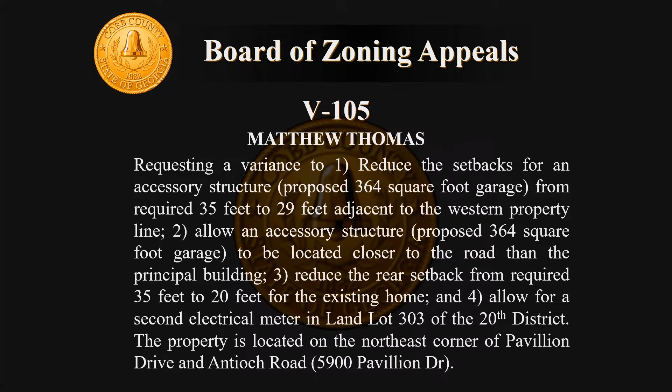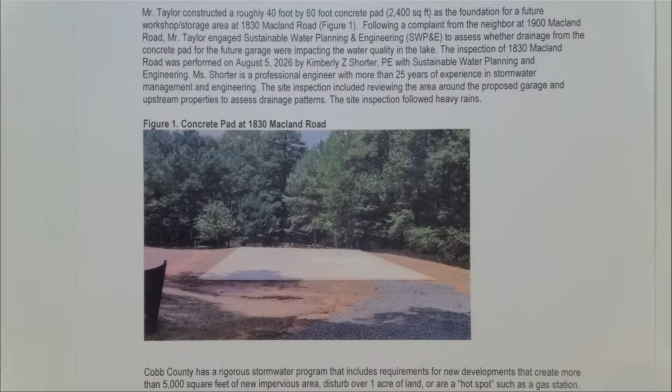The inspection of 1830 Macland Road was performed on August 5th, 2026 by Kimberly Shorter. The site inspection included reviewing the area around the proposed garage and upstream properties to assess drainage patterns. The site inspection followed heavy rains. Cobb County has a rigorous stormwater program that includes requirements for new developments that create more than 5,000 square feet of new impervious area, disturb over 1 acre of land, or a hot spot such as a gas station. This project does not meet any of those criteria and does not require a formal stormwater management plan.

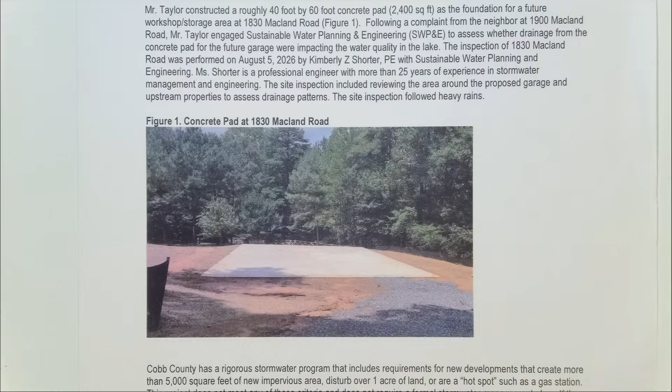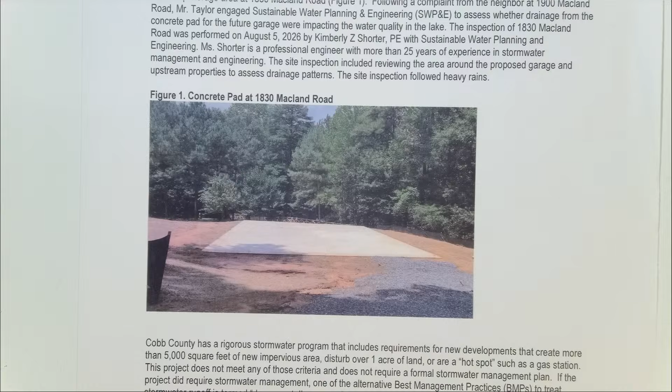According to the Georgia Stormwater Management Manual, downspout disconnects are appropriate for impervious area 2,500 square feet or less and require an overland vegetated path of at least 15 feet, Figure 2. This site meets these criteria, and most of the overland flow is over a considerably longer length than 15 feet. Currently, there are no signs of concentrated flow coming from the concrete pad at the property line downstream of the concrete pad, Figure 3.

During the inspection, there were signs of water draining across 1830 Macland Road onto 1900 Macland Road. However, this flow is generated on upstream properties and simply conveyed across Mr. Taylor's property. There is a pipe under the driveway located on 1846 Macland Road, but it appears to be shared by several properties, 1846, 1900, 1840, and possibly 1828 Macland Road.

Upstream stormwater is conveyed through the pipe under the driveway and onto 1830 Macland Road, which is our property. Stormwater flows through a riprap channel, and then sheet flows across the northern grassed area of 1830 Macland Road prior to flowing onto 1900 Macland Road, Figure 4. The flow bypasses the concrete pad area, and stormwater from the concrete pad does not flow into this drainage, Figure 5.

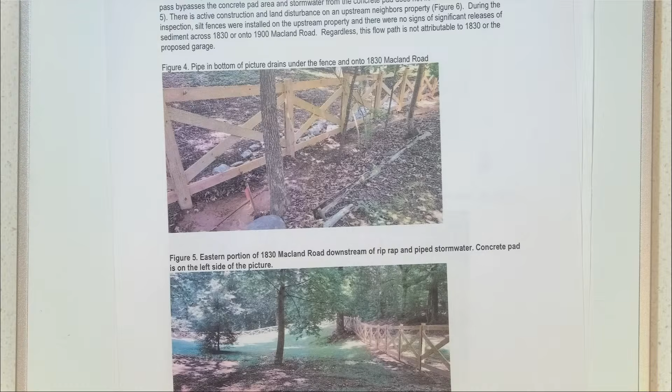From a drainage perspective, the concrete pad is in an ideal location. It is downstream of the septic tank, avoiding overwhelming the soils in that area. It is to the west of the drainage from upstream properties described in the previous paragraph. The majority of the drainage from the concrete pad flows west by southwest across the backyard of 1830 Macland Road in sheet flows for a distance of over 250 feet before leaving the property into the channel downstream of the pond in question, Figure 7.

The majority of the water from the concrete pad and proposed garage does not flow into the pond at 1900 Macland Road. It flows overland across 1830 Macland Road as sheet flows and infiltrates into the ground. A very small portion of the slope adjacent to the concrete pad does flow north. There were no signs at the property line of flow from the garage impacting 1900 Macland Road.

There do appear to be some flow patterns behind the fence located on 1830 Macland Road, where the water from 1900 Macland Road flows onto 1830 Macland Road and then back onto 1900 Macland Road, but there was no evidence of erosion or concentrated flows. This stormwater movement is due to natural topography and is not associated with the concrete pad or proposed garage.

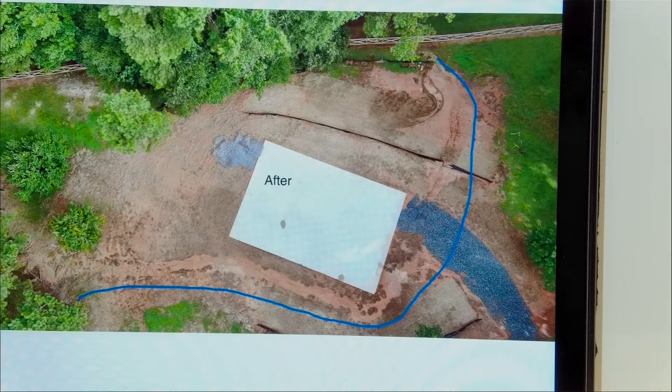You can clearly see from these before and after photos that the water flow is now being focused and diverted around this huge concrete slab to the east side, directly downhill to my property and continually adding sediment and debris to my pond. You can also see that it knocked down 3 separate layers of silt fence and washed most of the straw matting down the hill due to the extreme volume of water.

After this photo was taken, they repaired the silt fence and even added a 4th layer. Here's the aftermath of a 10-minute rainstorm this past Sunday. The water and mud easily made it past all 4 layers. I have video of this at the end if there's time. You can also see that the ground was sloped in this direction on purpose. All the runoff from the neighboring property at 1828 Macland Road also flows into the same area through a culvert under the driveway. So now all the runoff from both properties is being focused in one small area.

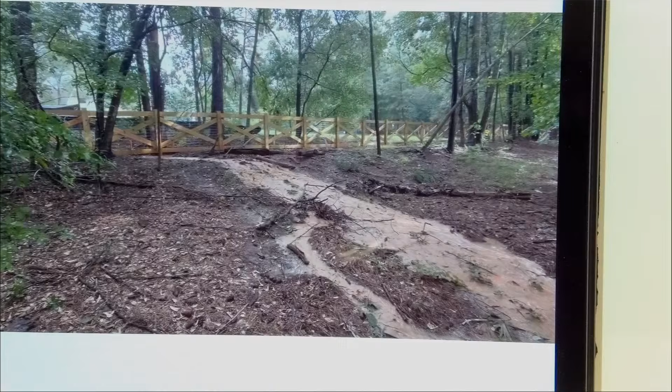There is a swale that runs along the property line on my side, which is meant to carry the water off to the west and away from the pond. Since the construction started, it has eroded away directly below the slab, allowing almost all the runoff to go straight down the hill into the pond. This blatantly defies Georgia common law, which says that an uphill property owner cannot deliberately redirect and focus water runoff onto a downhill property other than what would occur naturally.

As I stated in the last hearing, having a natural slope and permeable ground always allowed the runoff to dissipate without causing any damage, but that's not the case anymore. I've lived on this property for over 20 years and never experienced these issues until this unpermitted construction started back in February. This is one of the reasons why the 100-foot setback is so important in this situation.

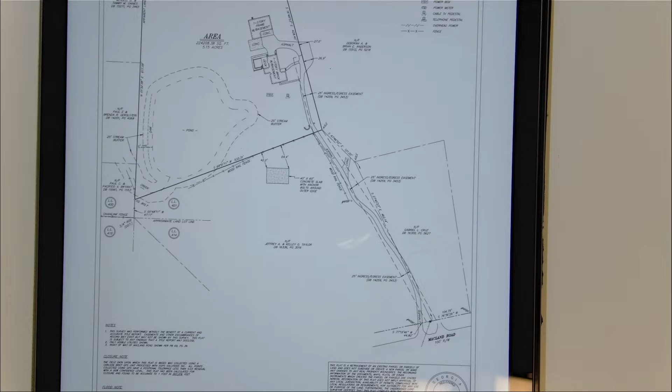I also want to address a few points I made in the last hearing that were brought into question. First being the exact location of the slab. I had stated that the slab was around 40 feet from the property line, while Mr. Taylor stated when asked directly that no part of the slab was closer than 86 feet to the property line. I recently had a certified survey of my property done and also had them precisely locate the slab's location in relation to the property line. And it is exactly 42.2 feet.

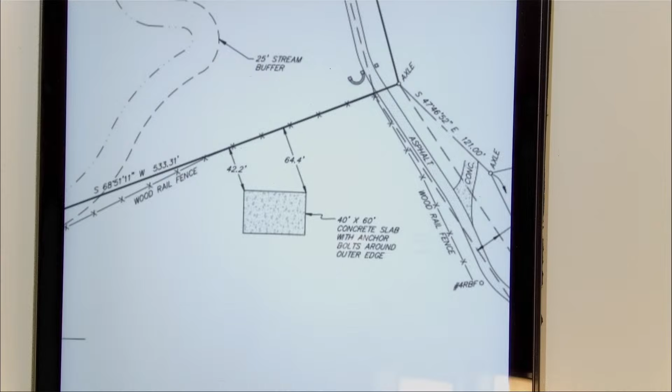Mr. Taylor knew all along that it was much closer than 86 feet, and I know this because here's a site map he submitted with his building permit application back in March of this year after he was shut down by the county. You can see that he wrote in a dimension of 50 feet from the line.

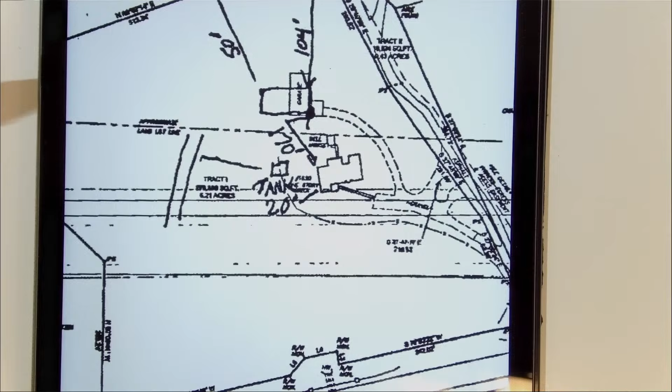Also, this survey that he's used for the permit and variance applications is an old survey from 2017, and none of the buildings on it exist anymore. The house on this survey was built in 1950 and torn down in 2018. The building labeled garage was actually a pole barn, also built in the 50s and torn down in 2017.

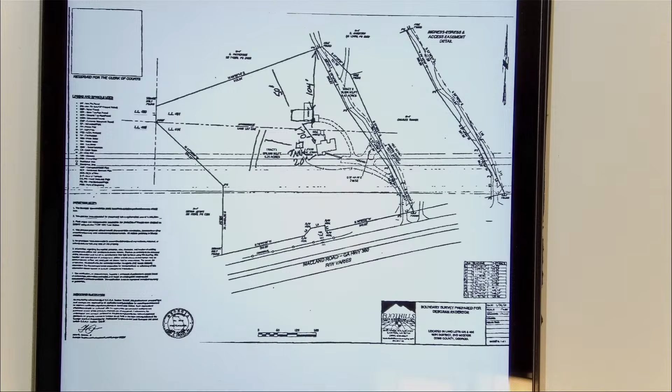Here's a simple tracing comparing the 2 surveys, and you can clearly see the old barn was in a completely different location than the new slab, even though Mr. Taylor claimed there was a building on this location previously. I have copies of both surveys for you to compare for yourselves.

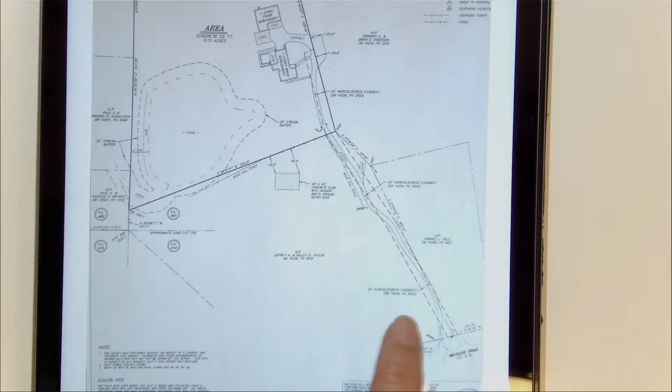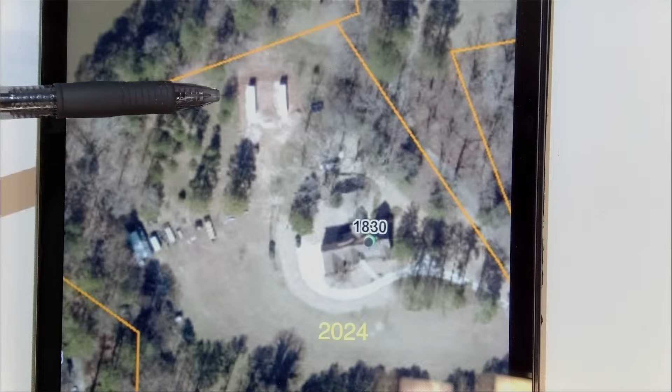Here are some aerial photos from the Cobb County website over the years. Here it is in 2019, right after the current house was built. As you can see, there are no other buildings on the property. As we move along to 2024, you can see where the previous owner had tried to build a pole barn over 2 shipping containers. This was immediately stopped by Cobb County, and he was forced to remove everything, as you can see on the 2025 and 2026 photos. That's after everything was removed before the Taylors purchased it.

The ground in this location never had any permanent foundation, only some gravel and fill dirt. A precedent has already been established by the county that this site was not suitable to build on for multiple reasons.

On the subject of his permit application, the proposed building would have 12-foot tall walls with corrugated metal siding and what looks to be a 6/12 pitch roof, creating a nearly 20-foot tall industrial-style building in a residential zone property. I brought copies of the permit application for your review if needed also.

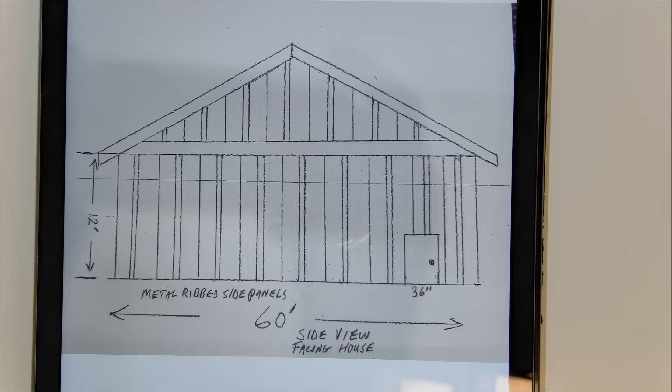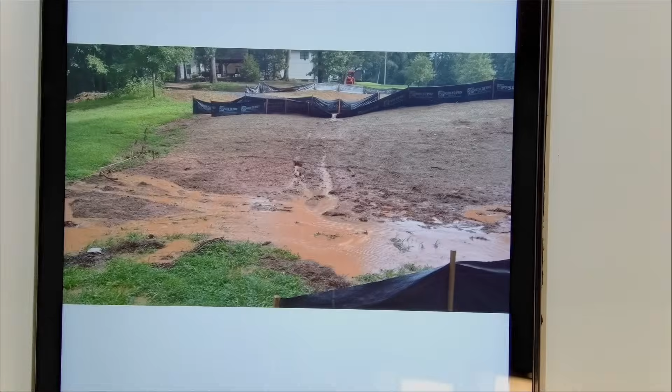I have yet to hear a legitimate reason given why there's no other suitable spot for the structure that meets zoning requirements, or if it has even been thoroughly considered, which is the standard for granting a variance. The only reasons given seem to be that it's just the spot where they want to put it because it's at the back of their property and far away from their own house.

The problem is that the back of their property is the front of mine, and they want to put a house-sized, commercial-style building right at the entrance to my property. As I've stated before, there are multiple areas on the property that would easily meet all zoning requirements and alleviate much of the runoff issues. As a 47-year resident of Cobb County, I'm once again urging the board to uphold Cobb's longstanding zoning rules, which we all are aware of when buying property, and not reward someone that's deliberately ignored those rules.

And now this is the video from last Sunday. This is with 4 layers of silt fence. That was the swale that's been referred to. This is where it's eroded away and going straight down the hill to my property. And you can see it's coming directly from around the side of the slab. There was never any complaint about the slab itself running off onto the property. It's diverting the water around it. This is after the rain stopped and only a 10-minute rainstorm.

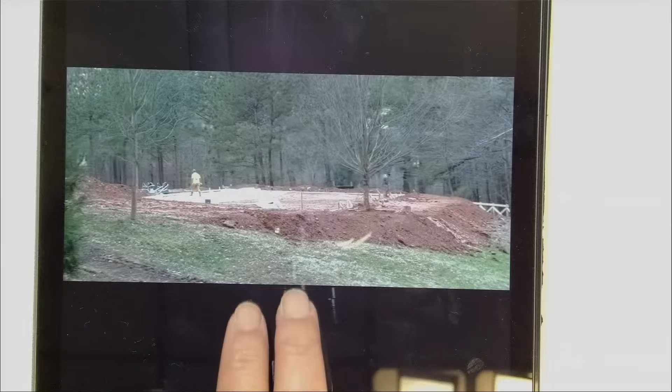One more thing I'd like to touch on. In the last hearing, I stated the slab was probably not code compliant due to the lack of footings. Mr. Taylor claimed that there are 24-inch deep footings around the perimeter. I made my statement from what I personally witnessed when the slab was graded and poured, and going by my nearly 40 years of experience in the construction business.

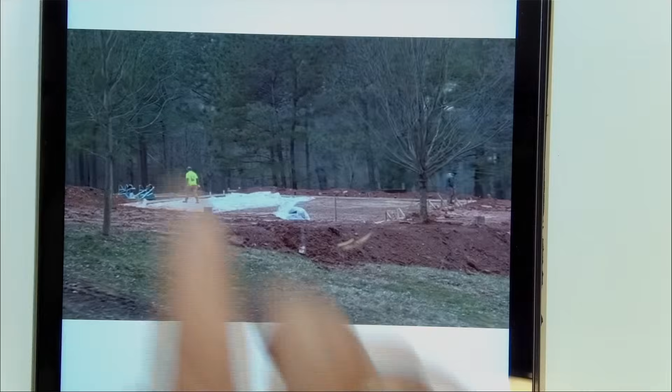It was suggested by the board that the slab should be looked at by an engineer due to the fact that no inspections had been done to any of the work, but I have not heard any follow-up to that. That was the slab when it was being graded. It's pretty obvious to a trained eye that there's no footings dug there. That's all I have, I think.

You do have 55 seconds, excuse me, left. Is there anything else that you would like to share with us? I guess I'd just like to add that Mr. Taylor showed up at my property this morning about 3 hours ago, the first time I've ever spoken to him in my life. So 6 months of this, and that was the first contact ever made, so for what it's worth. Okay. If that concludes your testimony, I will turn this over to our District 1 Commissioner,

Commissioner Berloin, to lead our discussion. Go ahead. Thank you, Chair. Let me start with you, Mr. Patterson. So those photographs you began with today, when did you take those photographs? Which ones? The ones you started your presentation with this afternoon? Not the historical photographs, right. This one, oh, I'm sorry. That one was before the recent work started.

Then the next one, that's when they started regrading it before we got any rain. So when was this regrading approximately? About 2 weeks ago it started. Okay. Well, July 31st was when that was taken. All right. So tell me about the conditions. I mean, this variance first was filed for in like March of this year, sometime earlier in the spring. Tell me what things were like, not just in the last 2 weeks, but say in May of this year.

If you could, with the time that you have remaining, just give us a synopsis or a summary of what it is that you're trying to accomplish. Just remind us again of your variance case, please. Okay, so we built a pergola in the backyard, which we did not obtain a permit. We did not know that we needed a permit because it was just a pergola. The landscapers that built it for us said, oh, you don't need a permit, you don't live in an HOA. So we believed them. We got it constructed, and then the neighbor next door put in the complaint that it was too big, that it was over her property line, and that was about it.

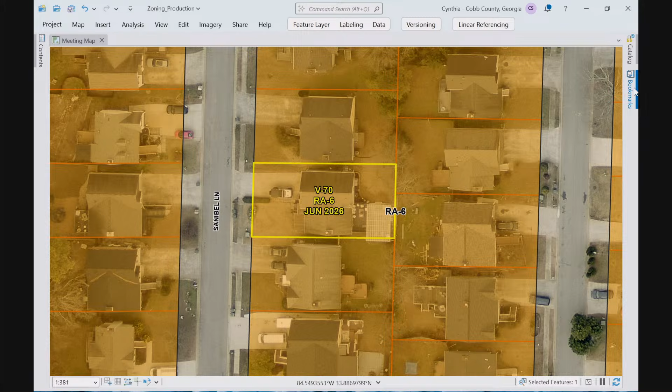Okay. Is there anything else that you'd like to share with us since? Well, since the last time, we reduced the pergola a little bit because she says that we were on her property line. So I reduced like 8 inches, so I'm away from her line, and everything that she told us that we have to do, we did. So we fixed all the problems, so I guess that's why she's not here, since we fixed everything that was bothering her. We also replaced a piece of grass.

We removed a fence door that we put in between, which she had agreed with, but she changed her mind and she said remove it, so we removed it. She did ask for us to reimburse her $500 for 3 trees that he cut, and that's the last thing we heard. Last time she was here, she said that she was going to sue us, but we never heard anything from anybody. Okay.

Does that conclude your testimony? Because you have 7 minutes and 57 seconds remaining. No, that's it. Okay, if you guys can remain, because there is an opposition here, we'll close the public hearing for this. This does reside in my district, so I will lead the discussion. Just have a few questions.

I know that there was heavy opposition here last time. She had a lot of things that were of concerns to her, and she's not here today in opposition. And you said that you were able to satisfy her concerns, even with the $500 that she asked for. Did you remit that to her? We have not given it to her because we said we have no problem giving you that. Even though originally she said that she paid $75 for each one, we were like, that's fine, for the inconvenience or whatever. But we told her that we just needed a paper where she is agreeing that that's what she wanted. But like I said, we didn't hear anything from her afterwards.

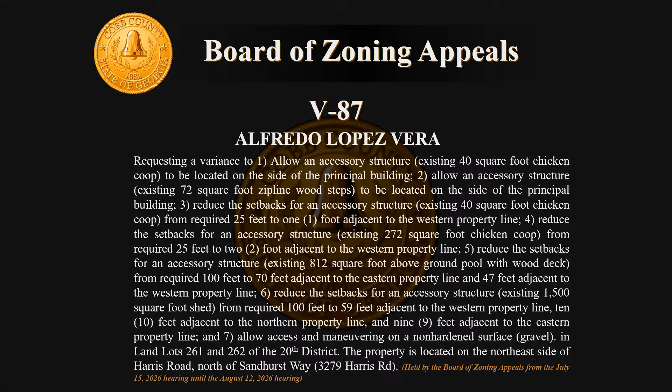Is the applicant present? Let the record show the applicant is here. Is there anyone here opposed to variance case V87? Okay, let the record show there's no one opposed. Would the applicant please come forward to be sworn in? Good afternoon. If you will state your name for the record and begin your presentation, you have 10 minutes.

Brenda Barahona. So I brought all the information that you guys asked me for. I took a lot of pictures, so I'm prepared this time. I did take it on my phone. I'm going to show you the pictures of the machines that we have there and the proof that they're in compliance with what the weight limit was. So this is the first one. That's a skid steer, and the weight is 1,350 kilograms, which in pounds is 2,976.

This is the other one. It's a compact excavator. And I just put all the information with the serial number on there, and it's 5,780. So those are the two machines that we have stored back there, and that's what my dad was using to fix the land. So this is what it looks like now. We removed absolutely everything, including the racks that were there. We just didn't want to even leave the racks just in case that was an issue too.

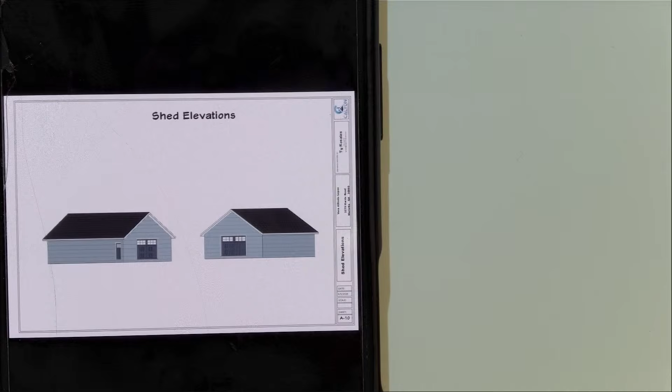So this here is what our architect gave us. I don't think that looks anything similar to what we're gonna do. So I just went on ChatGPT and designed it myself. This is exactly how we wanted it to look. I want to make sure that it blends in with the whole wood area and all that stuff. So that's how we wanted it to look.

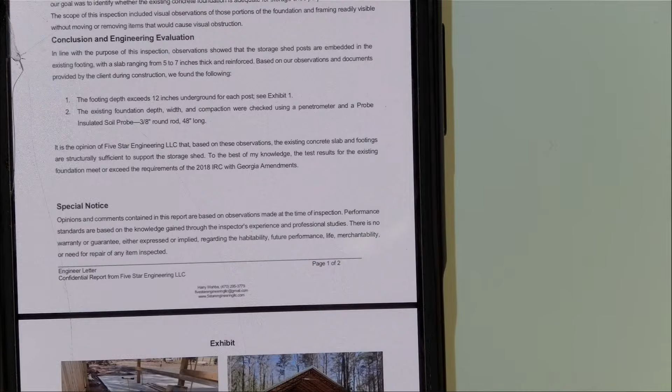And then I also wanted to show you guys, this is like extra, but we did get an engineer letter when we had first done it. I got the engineer straight from the community development's website, because it has a list of third-party approved engineers. We made sure we got it there and that everything was good with the shed. So that's what he had to say, that everything's good, footings are good, and everything is fine.

I don't know if you guys can read it or make it bigger. And yeah, I think that was it. I don't think I have anything else to say. First of all, good job. Thank you. Very, very good. You definitely delivered on everything that we asked you to since last meeting, so thank you for providing that information.

This does reside in my district. I'll lead the discussion, but I'll start with my fellow commissioners first to see if they have anything, and then I'll go. Anything? No? Okay. Well, actually, you can have a seat. Okay, thank you. Again, thank you for providing that context. The opposition that was here is not here today. I feel like I've seen enough to make a motion.

I make a motion to approve V87 with staff comments, no commercial or residential usage, and the structure to be permitted and inspected by county staff. Second. Can I just ask John a question?

The structure does encroach into the sewer easement, so the proposed pergola would as well, which is a code violation. The property owner, as far as I'm aware, has not reached out to me about that matter. So since the structure is encroaching, can you explain your sewer easement? Because you have so much from the sewer, and then you have an additional, so how close are they to the sewer easement?

So the sewer easement is 20 feet wide. The pipe is actually on the property line, so the sewer easement extends 10 feet into the applicant's property. And then our code also requires structures to be at least 2 feet off of that easement. So there's basically 12 feet off of their property line that they would have to stay outside of. And the existing deck and the proposed pergola encroach into that sewer easement.

I think it's 4 feet off the property line. Is that right, John? Pardon me? 4 feet off the property line, is that what the structure is? Yes. It should be more than that. Okay, so yeah, it does encroach into the sewer easement itself. And so historically, we have not allowed structures that are encroaching that far into a sewer easement because of the fact that if there is an issue with the sewer, you would have to come in and remove structures.

Yeah, it does inhibit our ability to access and maintain the sewer system, so our code doesn't allow structures within the easements, and when they are in the easements, it is a problem for us. Okay. Thank you so much. Does anyone have any more questions on that? So then, thank you. And then, Mr. Heath? You sure? Okay.

Hello, Andrew Heath, Cobb Stormwater Management. Again, did the applicant reach out to you with regards to the driveway being in the stream buffer, 25 feet in the stream buffer? Did they reach out to you to ask about that and what the issues are, the requirement is?

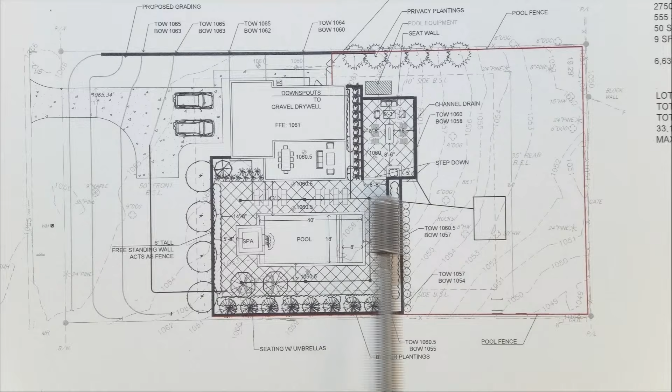Again, as you saw on the overhead and the GIS, his house and property is located here. So the number one impacted property is his own by this arrangement. Certainly, just by looking at a flat piece of paper, if the pool was to be to the rear with the house in front, a more traditional orientation that would not require a variance, the question is why move it to the side when you can do it in the back? The issue here is a couple of things. Number one, this property slopes from the street, Orchard Road, to the rear.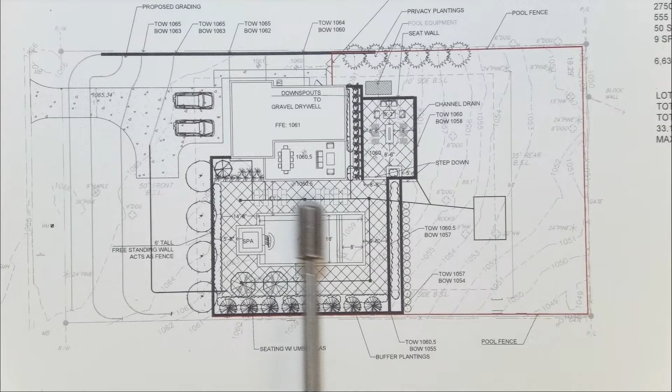And as you get to about this location in the property, that slope starts to get a little more intense, such that if you put the pool to the rear, it would require a retaining wall. That retaining wall, based on our professional designers and engineers' estimation, would be 15 to 20 feet and would have to drop down to the rear of the property here in order to install that. From a neighboring property, obviously you would then have a large wall at that location. Also, in terms of overall stormwater management, by placing the pool in this location, it leaves this area here without that level of disturbance.

In addition, you can see the small box here, which is placed there for purposes of stormwater management. So it allows for full stormwater management as well in this location, as well as a reduction in any walls and visual impact to neighboring properties, and therefore also keeping the impact of the planned improvements simply to this location, which only impacts him. Obviously, as the applicant and owner, he's consenting to that and is perfectly fine with that. In fact, if you can see how this would be arranged, he's able to do this so that he can obviously use the pool and house for his own personal purposes.

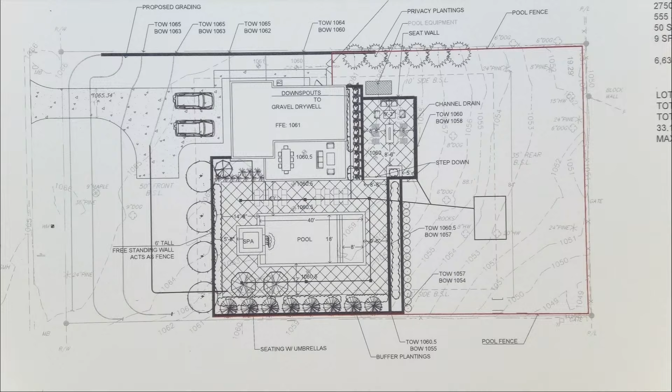I also wanted to reserve some time for the neighbor, Mr. Brown, that lives here, who also wants to speak and have a couple of comments in support. I know that's important for this board to hear from them, and I want to make sure I have enough time for him. But again, this variance request is simply to allow a pool to be to the side as opposed to the rear of the principal structure. And based on the topography of this lot, it's a far better location and has far less impact on any neighboring properties to place the pool in that location with that orientation. So for now, I'm going to turn it over to Matt and let him introduce himself, and he can speak to it.

My name is Matthew Brown. I do own the house on the other side, adjacent to the property, I guess the northern side. And I just hadn't had a chance to connect with Mr. Scalise before today in a meaningful way. I just had questions about what he was doing. He sent me the applications. I know him from before, and he's always been very straightforward about everything and transparent. So I just had some questions about where the equipment would be and how it would sit, and if there would be any grading, where any water would be going on my property. And he totally addressed those before the hearing.

So I have no opposition at all, and I'm quite confident that he's going to do a really nice project. I've seen work he's done before, and it's always top notch, and he doesn't cut any corners. So I'm just here in support of it now. All right? Thank you. All right, thank you.

With that, I'm available to answer any questions you may have. The applicant and owner, Mr. Scalise, is here as well, and we're happy to answer any questions that you would have. And if you don't have any, that'd be splendid as well, but I'm sure you will. But we'd respectfully request your approval of this variance request. I do know that, per Mr. Peterson's reading of this and per our review of the comments from staff, there was a comment from Cobb County Stormwater Management that we're in full agreement to. And our plan contemplates that comment and takes it into consideration, and we're in agreement with staff comments as well. Thank you. Thank you.

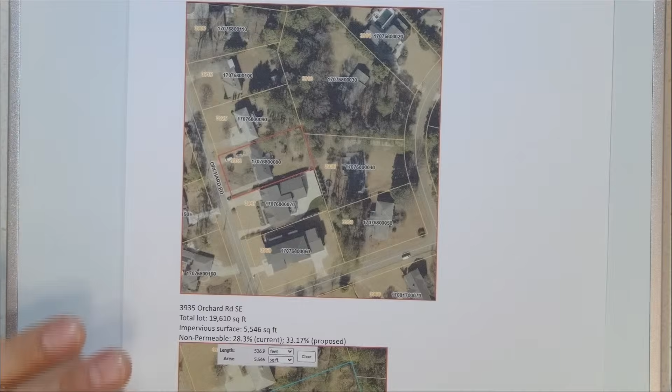While the variance, I understand, is pertinent to the side pool, placement of the pool on the side of the property, and it's not really about the non-permeable surface, I feel like it should be considered. Again, if you look at the 3 properties that I border, 2 of which the applicant owns, from GIS, the GIS website, I just have some quick figures.

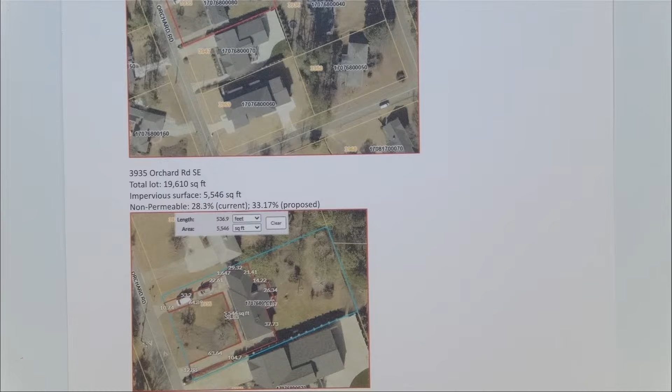So subject property, I've got an estimate of the lot about 19,600 square feet. Rough estimate showing about 5,500 square feet of impervious surface, brings currently about 28.3. I know in the variance packet that was provided, the proposed project is going to be at 33.17, which is within what the county likes, right?

But coming to the south, the top picture is, thank you, the applicant's house. Again, per GIS, doing my estimates, I have the lot at about 20,500 square feet, impervious surface estimated at about 14,900 square feet. It gives your non-permeable about 73.1% on that next property. Granted, he doesn't have a problem with the side pool. I feel like other properties should definitely be thought of.

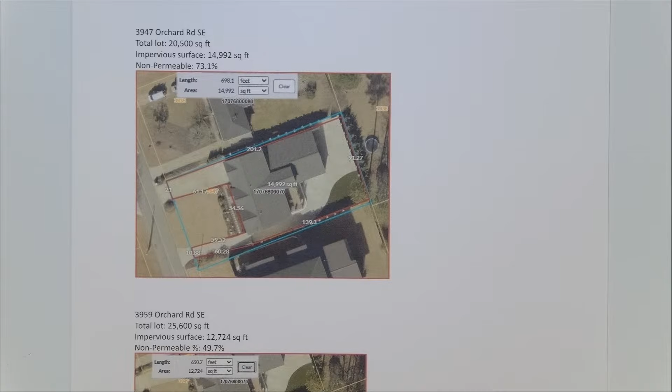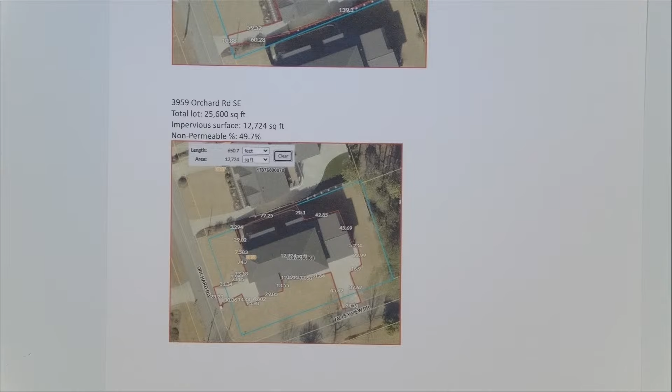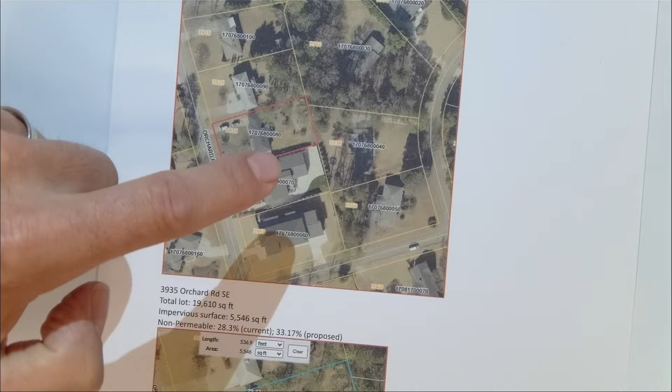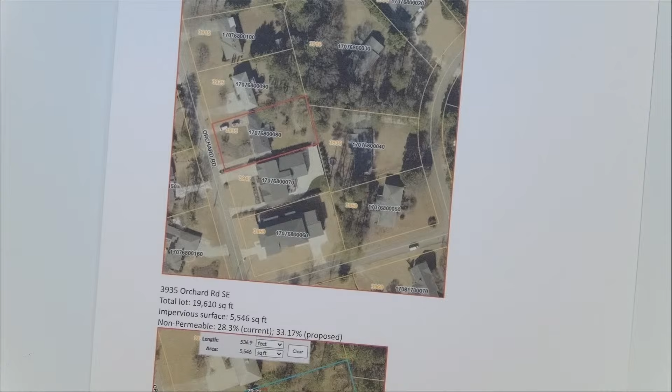So again, those 3 properties, right? Subject property, Scalise's other property, and the other one to the south. We're, again, estimating those 3 lots are about 65,000 square feet. Estimating right now we're looking at about 33,000 square feet of impervious surface. So those 3 lots are about 50.5% non-permeable. Based on my calculations, again, I'm not a licensed technical engineer or anything like that, right?

Last part I want to bring up, looking through the variance, and again, Mr. Moore brought it up, right? The plan and the hardship that they're showing for the variance being needed is because of the sloping backyard, right? If you look at the topography, which this was the map that was provided, that's the back side of the piece of paper. This is as is. If you can zoom that in or out for me, I much appreciate that.

Again, looking at that, I don't see a unique slope from the back edge of the back deck of the current house, which is about where a normal backyard pool would start, to the lowest part of the lot in the southeast corner of that lot. There's about 9 feet of slope, right? To me, that's about the normal depth of a swimming pool. That back part of the swimming pool, right there is your yard, right? So I don't see the slope causing a hardship. Maybe it's a little inconvenient having a residence with your pool in the backyard of the next property over. I don't see it as a hardship that requires a variance.

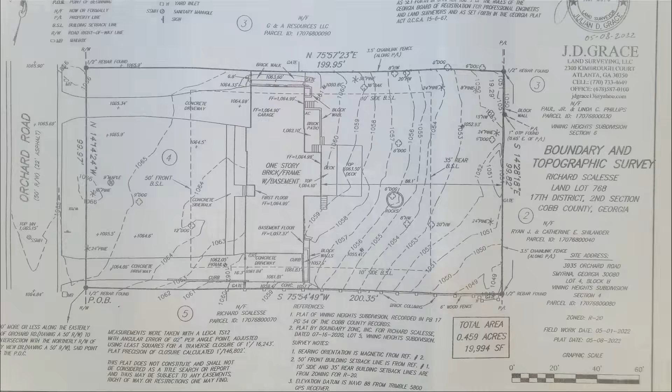Okay. I think that's all I have, unless, do I have time I can yield? You do, you have 3 minutes and 43 seconds. Okay, I am not going to use that. I will yield that time and be available for questions, should there be any. Awesome, thank you so much for your time. The time has been yielded. We'll close the public hearing on this one. Turn it over to Commissioner Swanson for leading the discussion.

The opposition has talked about some litigation on 2 properties. Mr. Johnson, can you please speak to that? As to the question about the encroachment or that affects? About the litigation, that's not something that's our purview? We don't take that into consideration? No, that's not before this board. At most, you might take notice of it, but it should not affect your decision as to whether or not there is a hardship presented. Okay, thank you so much for that.

Andrew, Mr. Heath, Andrew. It's a long day. Hello, Andrew Heath, Cobb Stormwater Management. Hi, Andrew.

So I know we first started with this whole variance, trying to figure out what was going on, especially when you look at this and there's a house and you can't see the pool fitting on the side. But now, it was nice enough to be able to get what it is that they're doing, and it's demoing the existing house, making a smaller house, and putting a pool to the side. So in doing all of this, can you speak to, I know that it is below the impervious coverage, and I know that there were concerns in the past with regards to runoff.

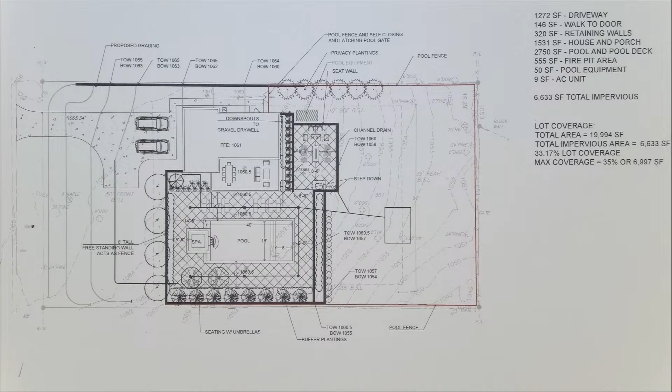Now, next question. We're asked to consider a variance today to allow the pool to go to the side or closer to a road than it otherwise generally would go. Assuming the pool was built further to the rear, would that in any way be more advantageous to the property owner who was in opposition today?

With respect to stormwater management, if the two are put one in front of the other, the house in front of the pool, then it does consume a little bit more of the lot area. Now, I'm not quite sure how it's situated now. It might potentially be able to move up a little closer to the front building line. But my main concern from a design standpoint is putting one behind the other. Do we have enough room behind the home to put the system in and then also create something behind the system to divert that water back into sheet flow again?

Right. So my thought is, if they put the pool behind the home, we could, if we needed to, like let's say they weren't getting a variance and they just brought in the house with a pool behind it, we would have to figure out a way to make that work. So I think we could do it either way. I think being to the side maybe preserves a little bit more room to the rear for us to work with, but honestly, we could probably make it work either way.

All right, but by allowing the variance and allowing this to be to the side, we're allowing there to be more room for both stormwater detention or control facilities and more room for greenery and other things to slow the surface water runoff. Yes. Thank you. Thank you very much for your assistance.

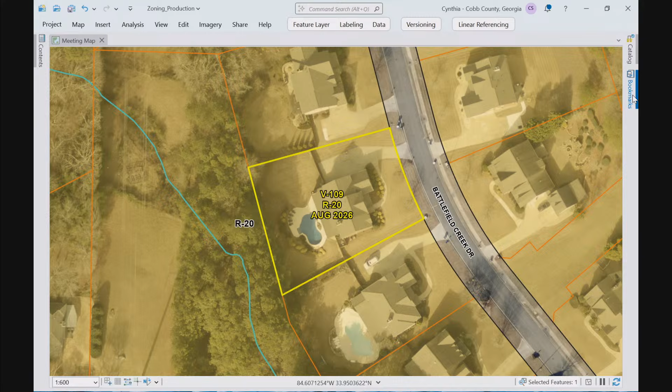So Mr. McDearest would like to do a attached two-car garage, 720 square feet. And so when we started the design and the site work, we noticed that his existing lot coverage was at 65%. So what we wanted to propose was to do the design in a way that we would pull it on part of his existing driveway, which is already non-permeable. And then the second half of it, we would

capture with a dry well system, or potentially his neighborhood has a retention pond, which sits in his backyard. So that's another option if we wanted to go that route, to just divert it there. But we're proposing a dry well system to just capture the extra 400 or 500 square feet of it, to where it would ultimately be 65%. So that's what we are proposing. Let's see. This might be a little microphone over here.

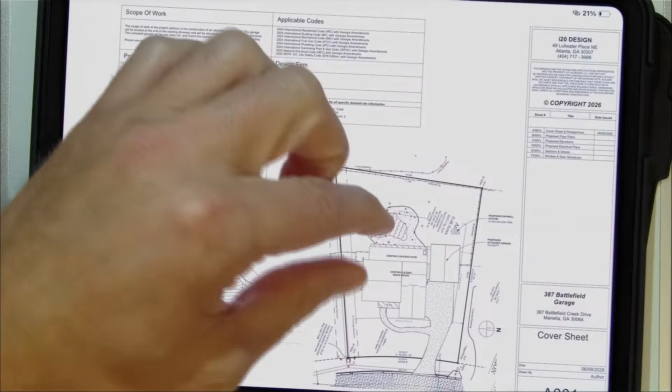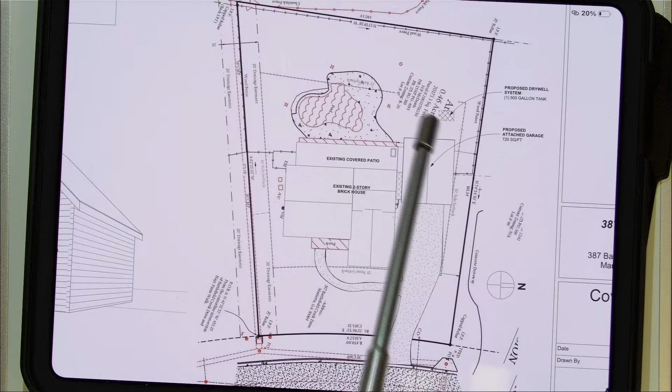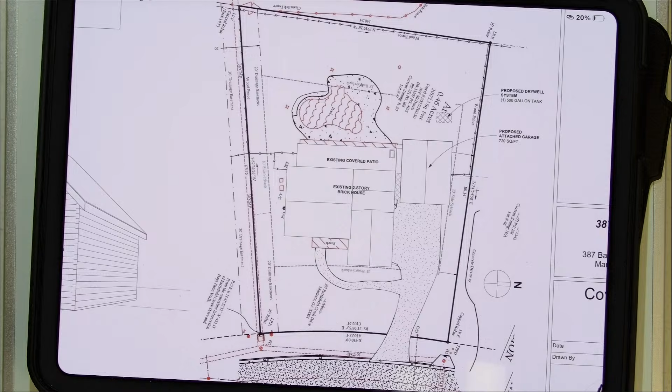So we are looking at the proposed site plan. So here's the property, existing house here, existing driveway. And so the 720 square feet is right here at the end of the driveway. And then the little square indicates a proposed dry well system. And then we can see on the very back of the survey is a chain link fence, which is protecting the existing detention pond. So that is an option if that was preferable. I think we would prefer to just divert it that way, or do a dry well system. But the request is to keep the lot coverage at 65%.

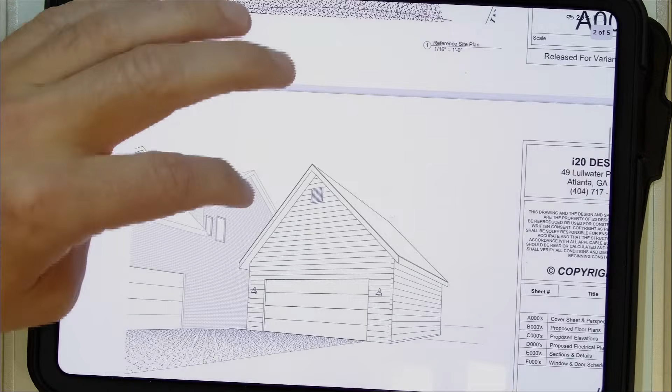And that's all I have. All right, you have a little over 6 minutes and 25 seconds, as with all other applicants. I think that's it. Okay. No worries. Without just giving unwanted information, so. Okay, well, this does reside in District 1, so Commissioner Boulogne, if you will lead the discussion.

Thank you. Let me start with Mr. Heath, if I could. Thank you. We should just give him a seat at the podium. Andrew Heath, Cobb Stormwater Management. All right. Do you have any idea how historically this happens, that we end up with 65% coverage when we're supposed to have 35%? Just keep building. Yeah. Do you know if the pool was, I'll ask the applicant as well, but do you know if the pool was there originally or if that was an add? That, I don't know. I don't know the whole history of the site. Okay.

If we were to approve the variance, would any stormwater mitigation be required? Yes, the applicant mentioned the detention pond behind the home, and that is convenient. However, at the time the subdivision was designed, it would have only been designed assuming that they built to the maximum on the lot. So while we would want the runoff from the site to eventually go into the detention pond, they would need to provide that additional mitigation actually on their lot for the amount that they're over the maximum. And that's the way my comments address it. So they would provide that mitigation, and then the overflow from that would then be directed to the pond.